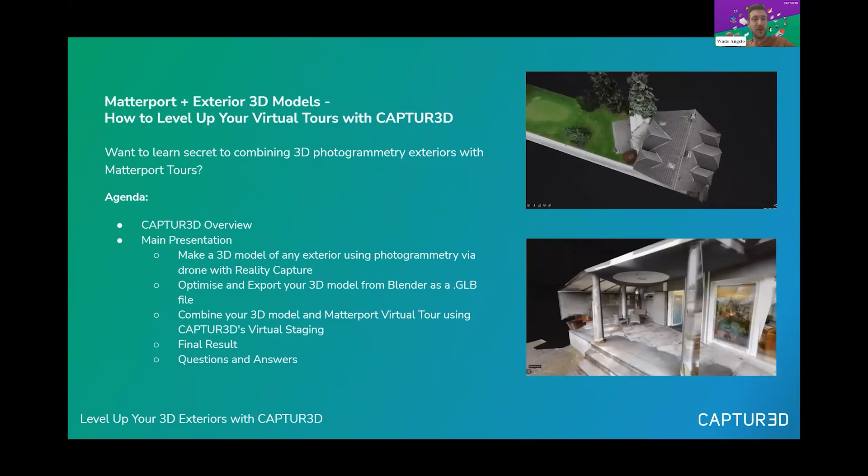So I'll start with my end and jump into what CAPTUR3D's all about. For anyone who doesn't know what CAPTUR3D is and you've jumped in today for the first time, CAPTUR3D is an all-in-one 3D virtual tour software and management platform specifically designed for Matterport professionals.

CAPTUR3D's been around for some time now. We established ourselves back in 2015. Prior to that, we were technically what's coined a Matterport service provider. From there, I believe we were essentially one of only a very small handful of individuals who had the MC200, which is the Pro 1 series of camera.

And from there, we basically brought ourselves this platform and CAPTUR3D to service our own customers. We leveraged what we know in this industry to build CAPTUR3D out to then service other customers who have purchased cameras. That's basically what we grew from there. We're servicing thousands of customers globally.

We've got some notable customers such as Google, Facebook, and Netflix who have been working alongside us. We are a sales and development partner with Matterport in terms of selling the actual hardware, be it the Pro 2, as well as some of the partnerships we have aligned with CAPTUR3D and their platform. We also have patents on some of the technology, which is exciting. We've got some pretty cool stuff behind the scenes, keeping our secret sauce close to our chest.

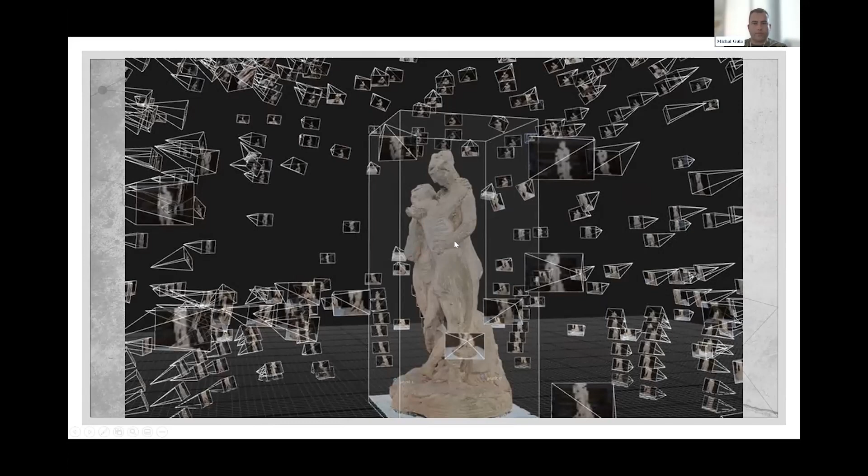So what we will be covering today is basic photogrammetry workflow, optimization of the model for CAPTUR3D, exporting into GLB file, and import and alignment into CAPTUR3D.

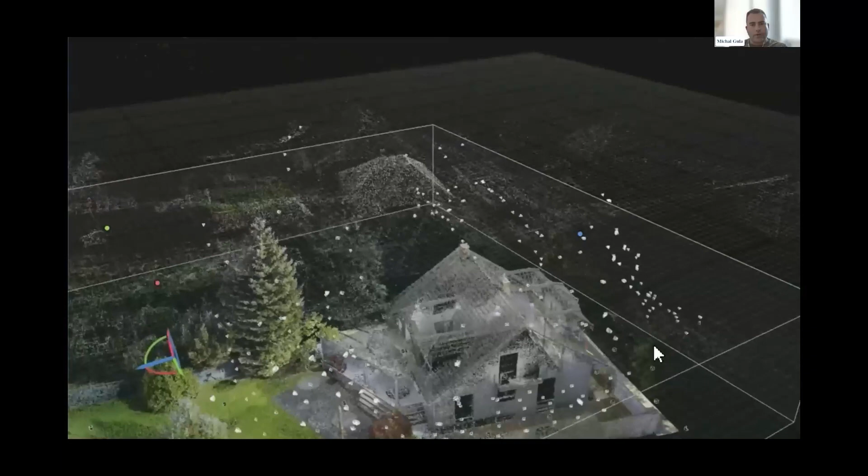In this video, you can see all the camera positions and all the images that were taken for this house project. There were many aerial photos, some ground photos, and also laser scans. You can identify laser scans by these circles, because a laser scan cannot see underneath, so it always leaves some marks.

All these cameras you can see around the house, these are all the positions of the camera where I had to go and take a picture. If you ask how many pictures, as many as you are able to do. In photogrammetry, there is never too big an amount of pictures. You always do as many as you can. Of course, it also depends on your computing power and your time, but the more pictures from more angles you take, the prettier the object will be.

So now we will go through the photogrammetry workflow in software called RealityCapture. It's one of the top softwares to use for this. You can also go through any other software, it will be pretty much very similar, so don't feel tied to RealityCapture. I just have different experience with different softwares, and this is where I ended up because I think it's one of the top.

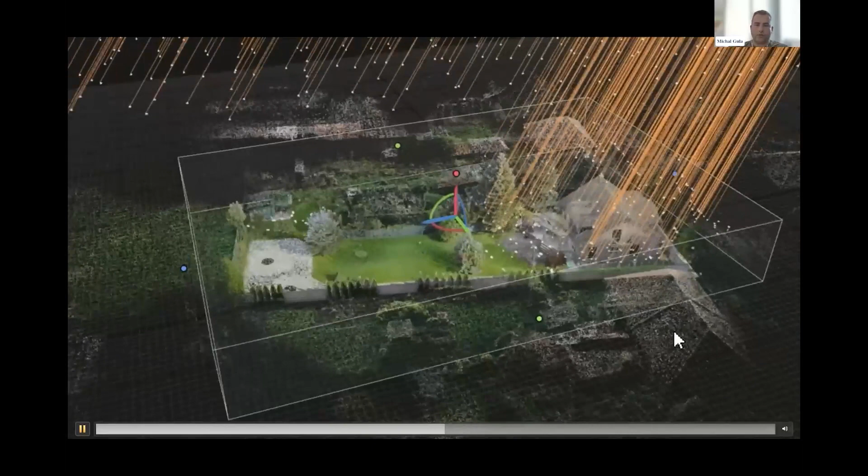Then you hit the Align button, and after a while, you will see the pre-reconstructed or aligned project. All these dots you can see on this picture, it's still not a 3D model.

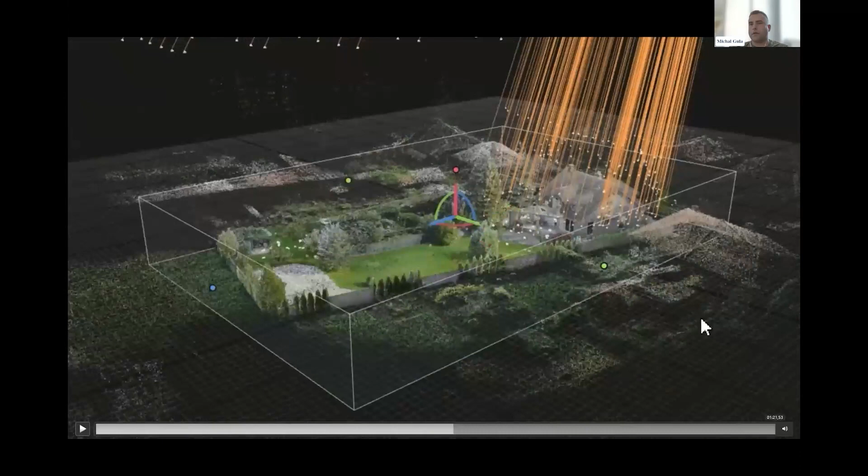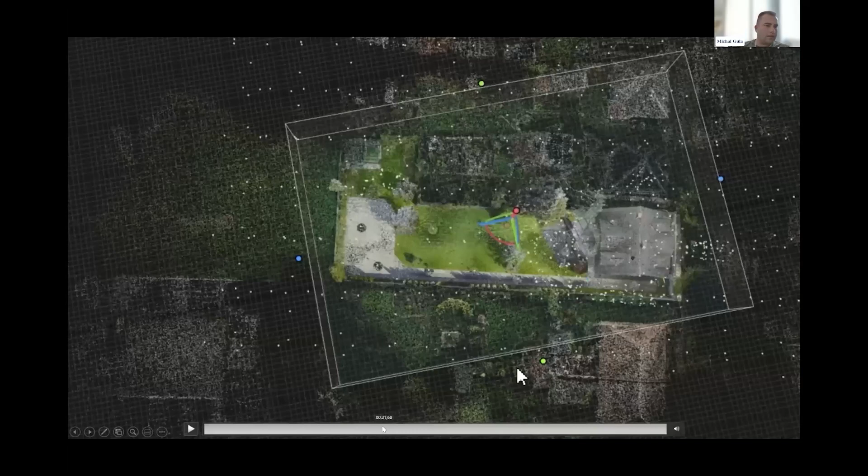It's just, sorry, I'll rewind it back a bit. Just give me a second. We were here. So this is still a learning process. Okay, it's just a few seconds.

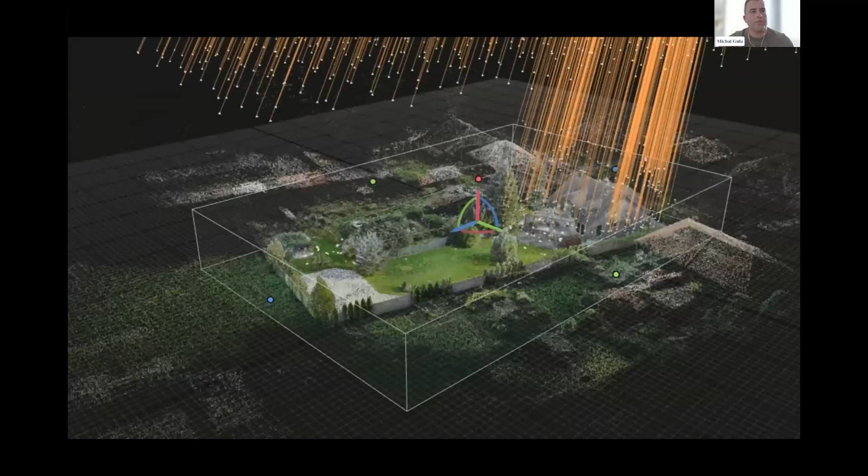These small dots you can see here, these are tie points. This is where the software finds similar places on the images. It makes them into tie points, and it tells them where to be in the 3D model. Now you can see one more time all the cameras and the camera positions. Okay, the alignment looked just fine, so we are happy and we can continue.

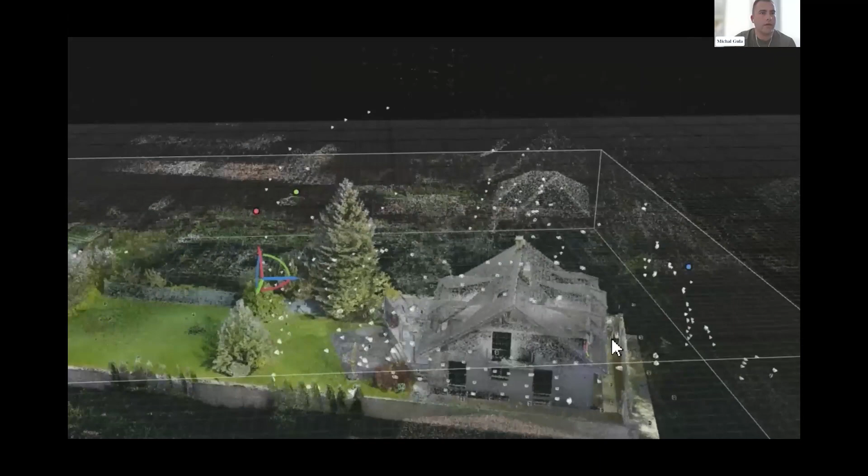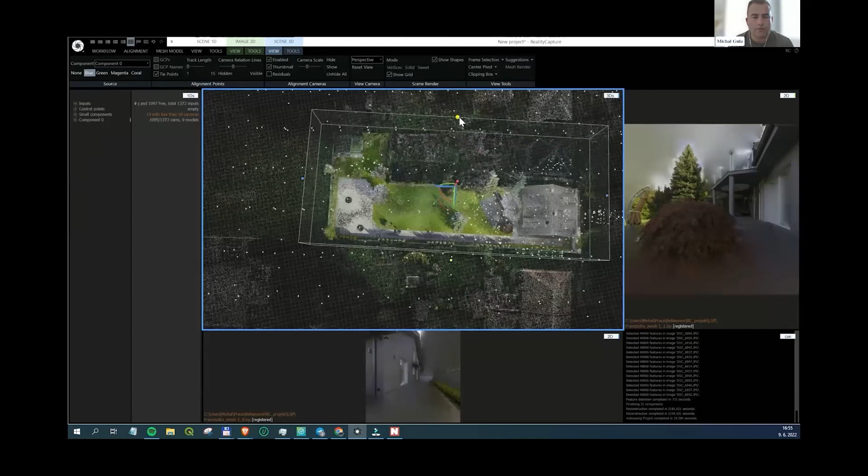The next step will be the reconstruction of the model, the meshing process, texturing process, and then optimization. As a first thing, you need to create the reconstruction region, because you don't need to reconstruct the whole scene that was captured. You only focus on the things that you want to be included, meshed, and reconstructed.

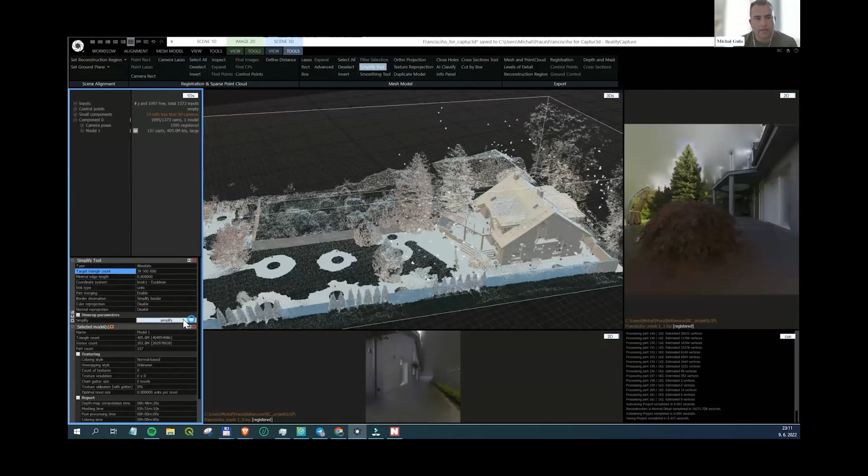The reconstructed object looks like this. It still has too many polygons to be shown nicely. You can see it's like 400 million polygons there. So as a first step, we need to get it under 40 million, so that RealityCapture is showing it as a solid. You will see it in a moment.

At this stage, you usually check if the mesh is okay, if you don't see any obvious mistakes or misalignments. If everything is okay, you just do the texturing at this stage.

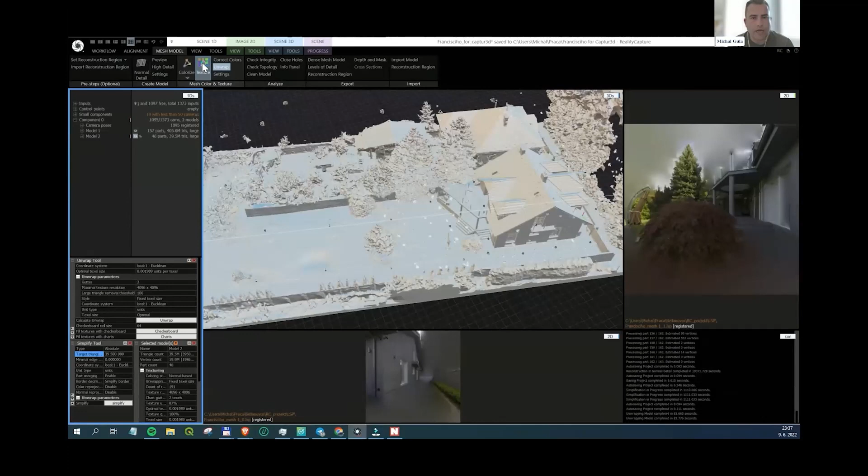It's going like this: at first, you have to unwrap the object. You can set basically what resolutions and how many pictures you want it to have on the textures, which will define how nice the texture will look like on the model.

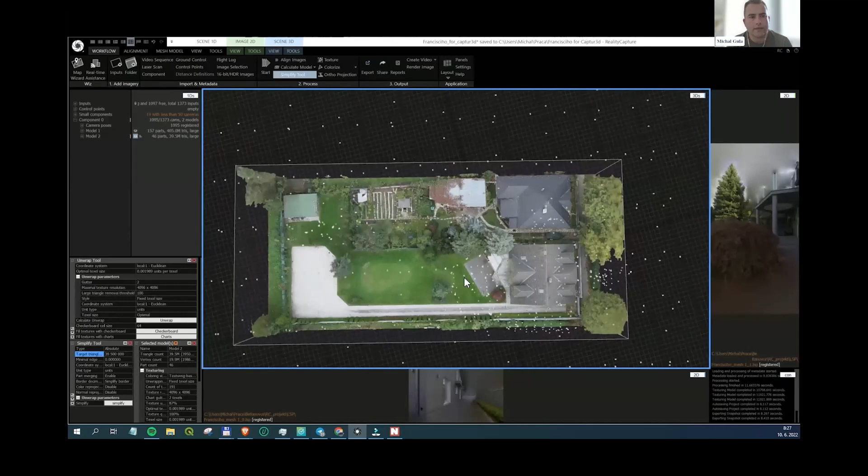So this is the textured model, but it's still pretty big. It still has almost 40 million polygons. It has, I don't see it now, but it has like 200 4K textures or something like that, which is too many. You wouldn't be probably able to display it even in other softwares online.

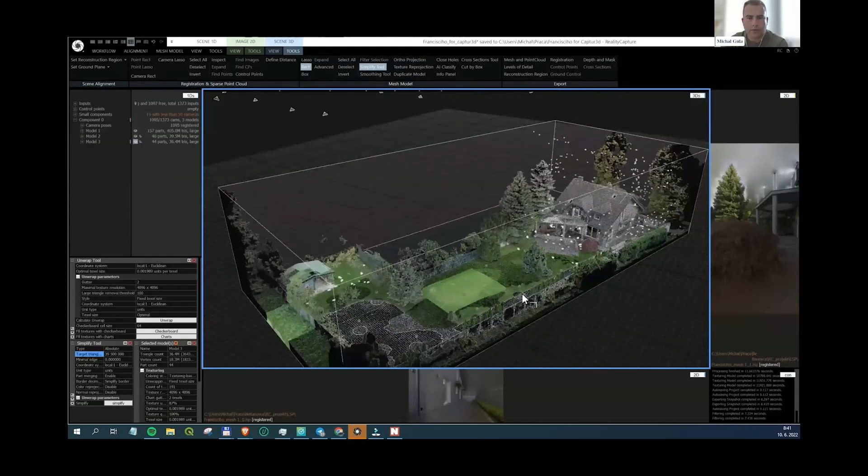So what we will do next is clean it up a bit. We need to get rid of the things that we don't like, or that are just ugly and we don't want to display on the model.

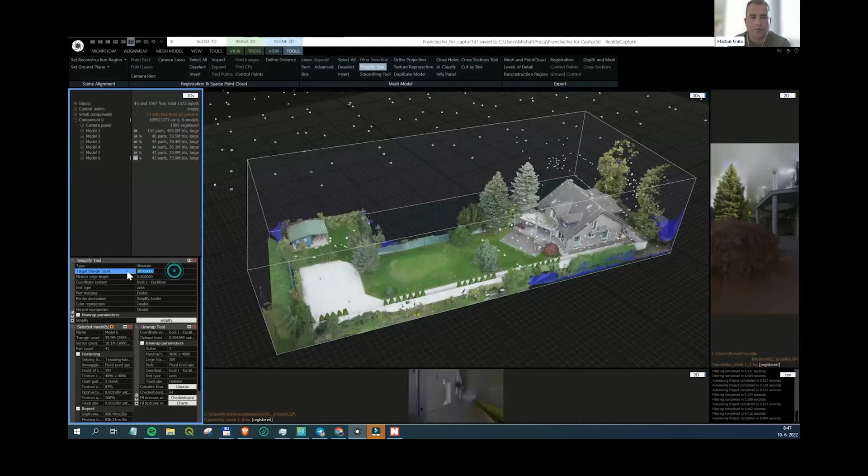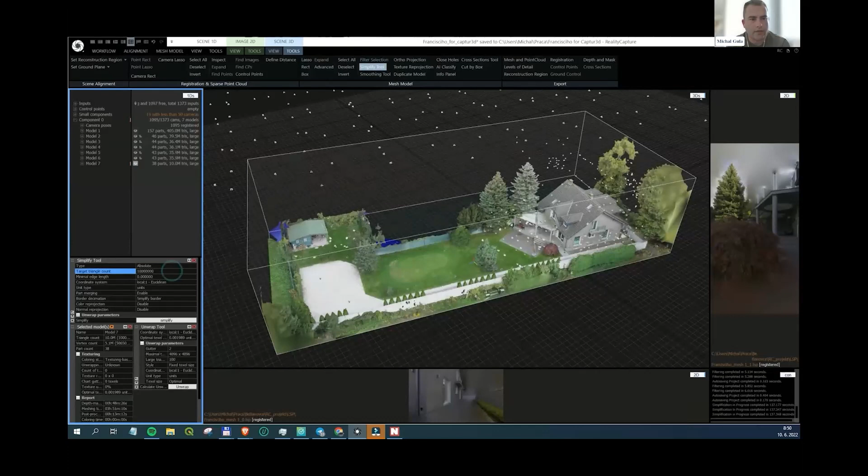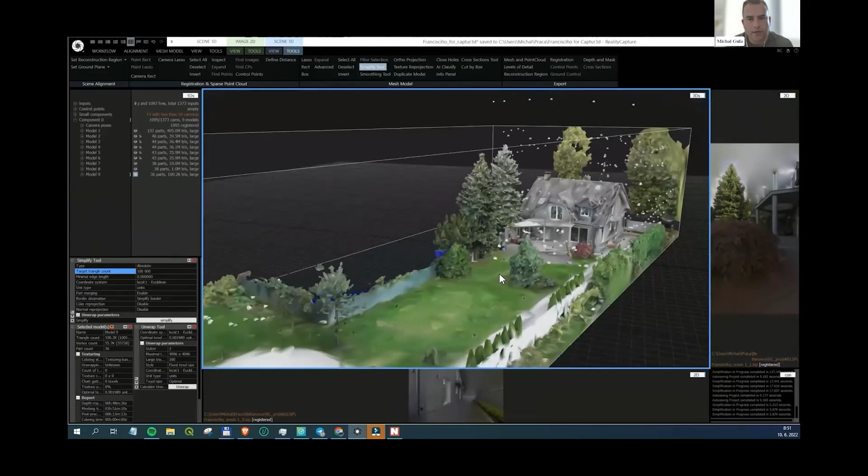We are doing the optimization and simplification in several steps. The software could be able to go straight down to like 1000 polygons, for example, but you want to check the model during the process because you might find some artifacts or mistakes which you would like to repair in the process.

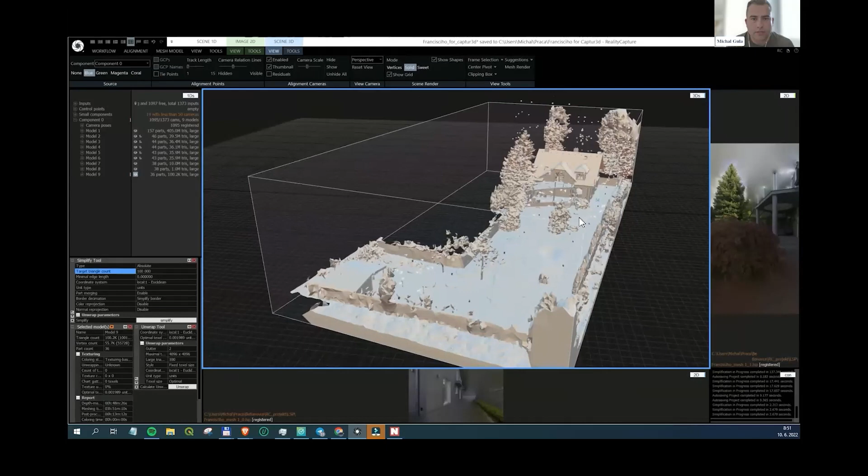So now we are at 100K polygons. The model still looks good enough. Just remember, textures can cover a lot of mistakes on the mesh model, so it's not that important that the model should be very pretty, very neat, very edgy. Textures will cover you.

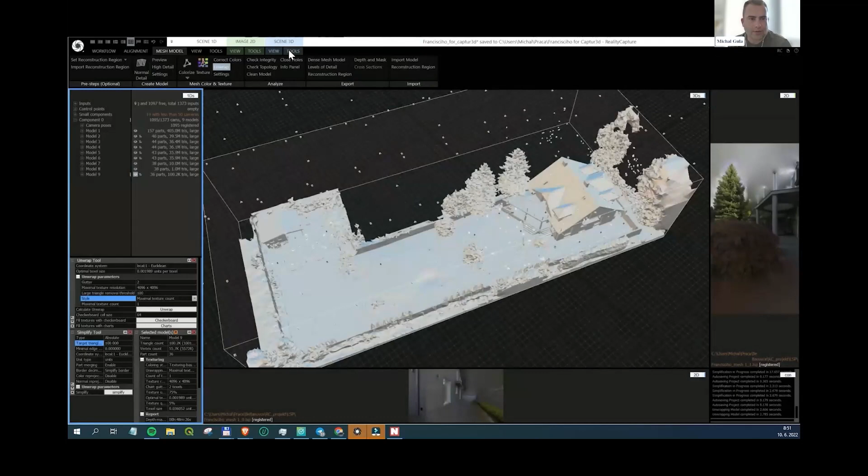So the next step is to reproject the textures from the earlier model. Okay, textures look fine, we do the reprojection now.

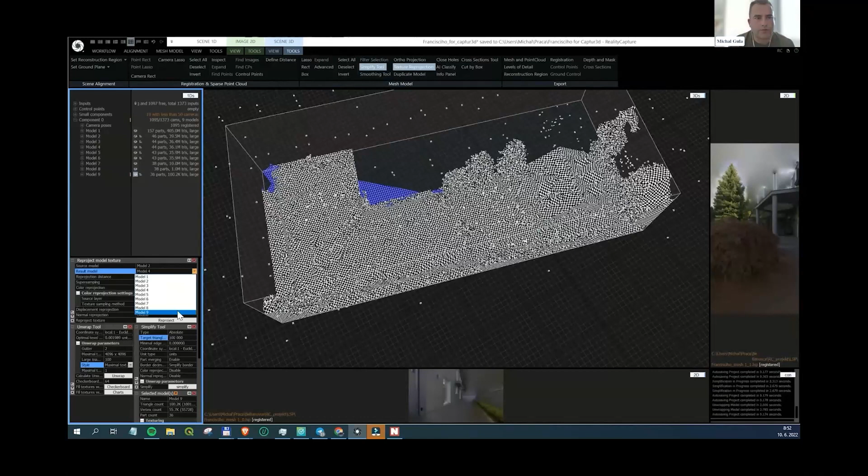You don't have to do the texture process all over again because the previous model was already textured. The software is able to just reproject the texture. It will save you a lot of time.

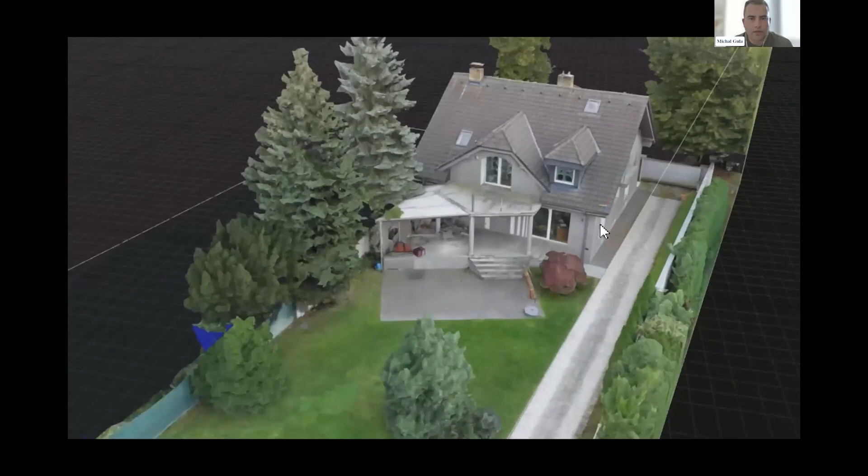So at this model, you can see that it's very similar to the 40 million polygons model, and it's much smaller. So this is what I'm talking about when I say that you need to optimize the project.

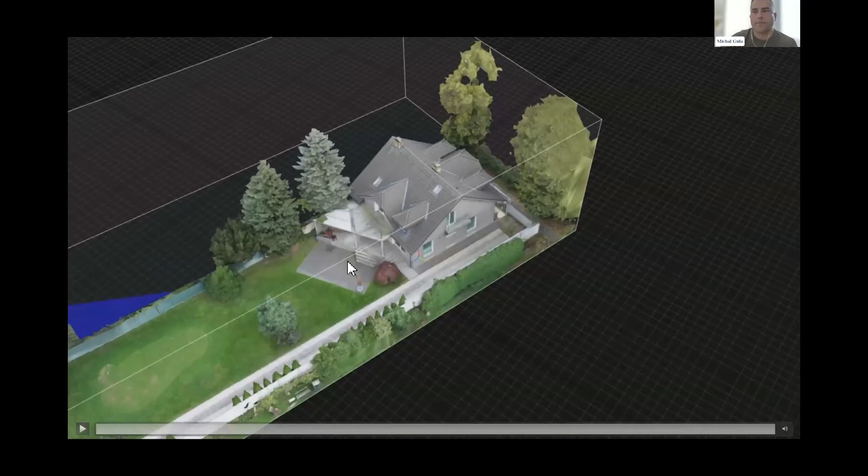You need to get it as small as possible to be able to work with it in Capture. So the next steps, or let me ask Wade if there are any questions. There were a couple of questions. One of the first was asking what software are you using?

I can see it is RealityCapture that you're using, but do you want to just describe in more detail what RealityCapture can do?

Yeah, well, it's pretty neat solution because it's really fast. It can take almost any data that you put into it. It can swallow laser scans. It can swallow aerial images, ground images. It can work with videos.

The videos will be processed and it will be basically cut into different images, and then the images will be processed. So I think that a lot of professionals are using exactly this software because, as I mentioned before, it's one of the top.

Another question was, because it doesn't seem this is available on Mac OS, was there any other different type, maybe Pix4D? I believe you mentioned Pix4D before, something that's on Mac that might be also appropriate for an operator.

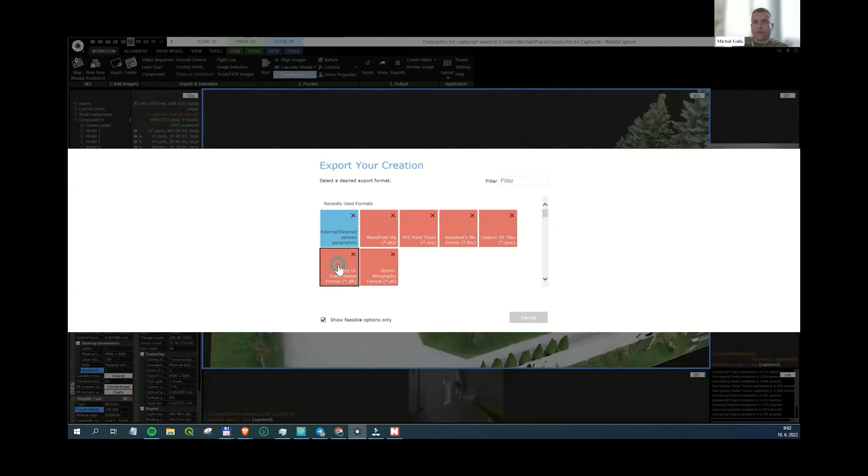Most softwares should have the possibility to export GLB files natively, so you don't have to use another software. In this case, RealityCapture has this function. It's pretty straightforward, you just pick where you want to locate the file and hit export.

What you need to check is that you don't want to spread it into more files, you want it as one file, so export save mesh by parts should be no. What you want to do is include textures, so export textures yes, export embedded textures yes. I'm not sure if RealityCapture also allows you to export non-embedded textures as separate files, but in my experience with GLB files, it's always better to embed textures into one file.

Nothing else should be changed. That's what I just talked about with the embedded textures. You hit OK and export the GLB file.

Another case is when you don't have these options, you usually want to export the OBJ file. OBJ is the most common file to export 3D objects, so every photogrammetry software certainly has this option, and you export the OBJ file.

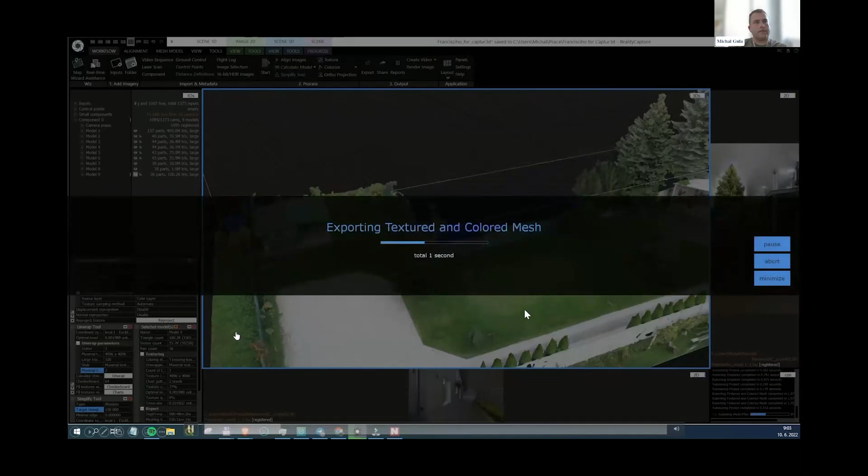Again, you don't want it split into different parts, you want it as one OBJ file. You don't need to embed textures because you'll be doing this in another step with Blender. So you just export the OBJ file with textures.

Then you're free to go into Blender. If you don't know it, it's open source free modeling software with an unlimited amount of options. So what you do is load your OBJ file. You can set the transformation, because when working with 3D it sometimes happens that your object ends up in the wrong position.

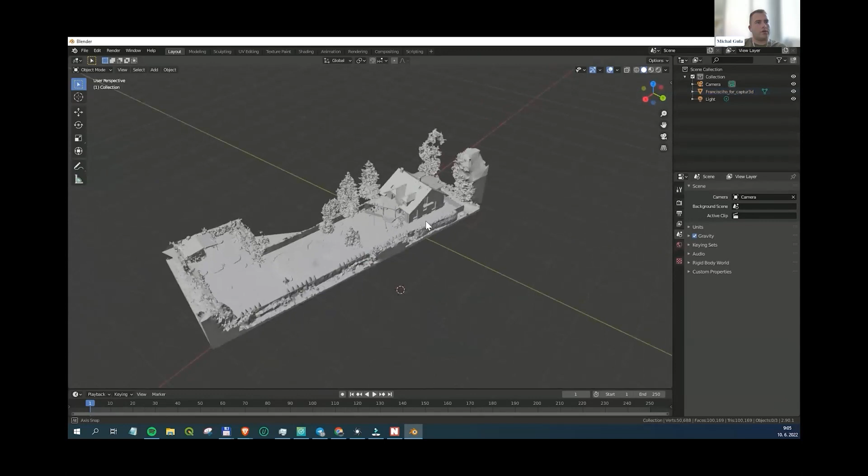So you load your textures into the viewport, and if you're happy with the model, you can export it. It's pretty straightforward, just hit export, you have the GLB option there. You just rename it and make sure you pick the GLB format.

Yes mate, thank you. I had a couple come through, actually more towards what kind of workstation is needed for this kind of speed. Are you able to provide what specs of computer you have currently that was running the software? Yeah, for this kind of speed you just need a good video cutting tool.

I sped it up for the video, but of course photogrammetry is quite heavy on your computing power. You need good CPU, good RAM, good GPU. The more images you want to process, the better computer you need. But basically the absolute minimum you need is an NVIDIA graphic card with CUDA cores.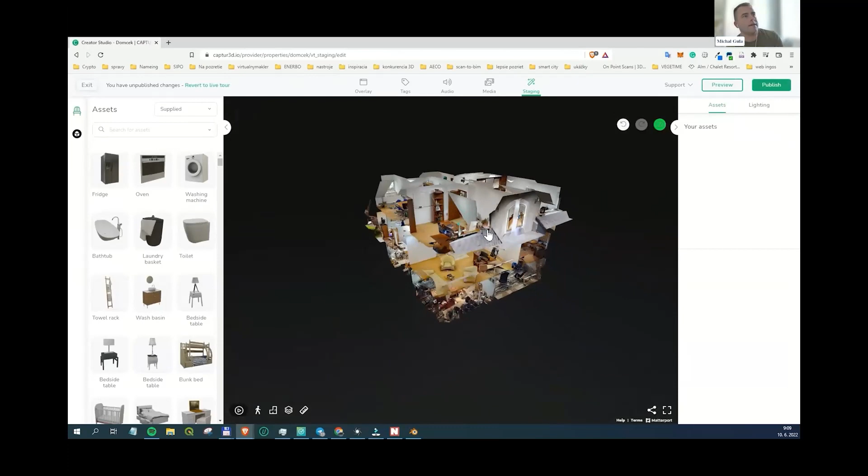So I had to redo the previous model. On the left side, you have the assets part where you want to load your own GLB file. You go to custom, hit upload, and just drag and drop or browse for your files. You pick your GLB file and move it there, so it will load into Captur3D and add it to your asset library. While that's loading, you can also add custom thumbnails to make it easier to find.

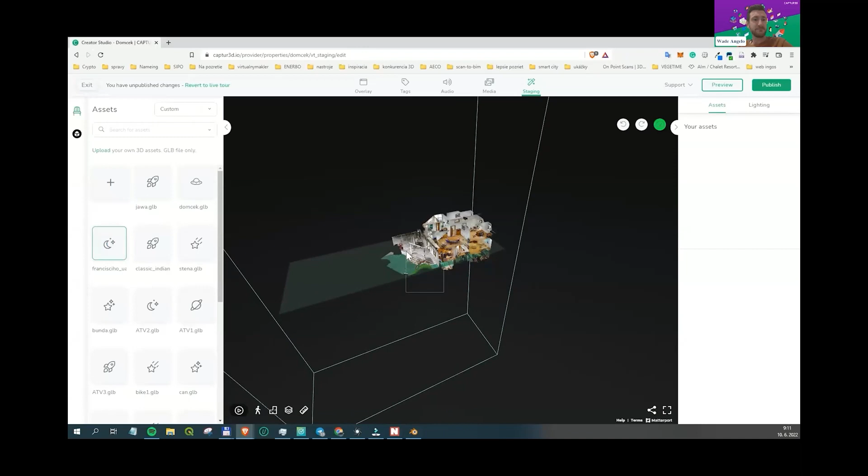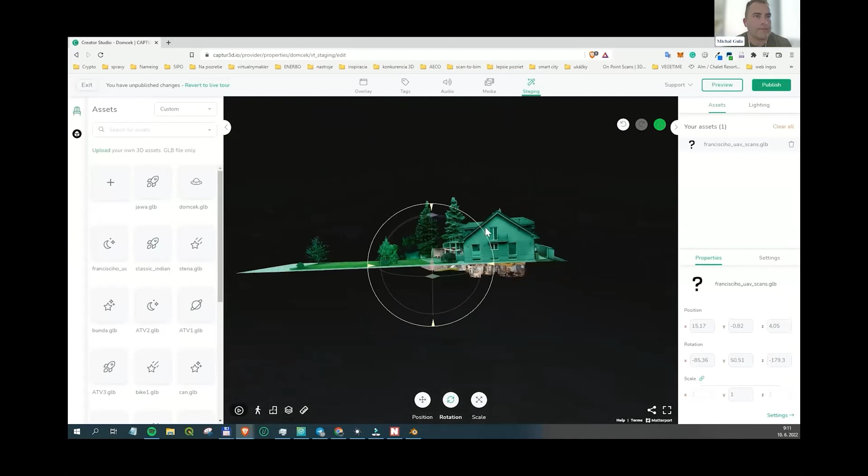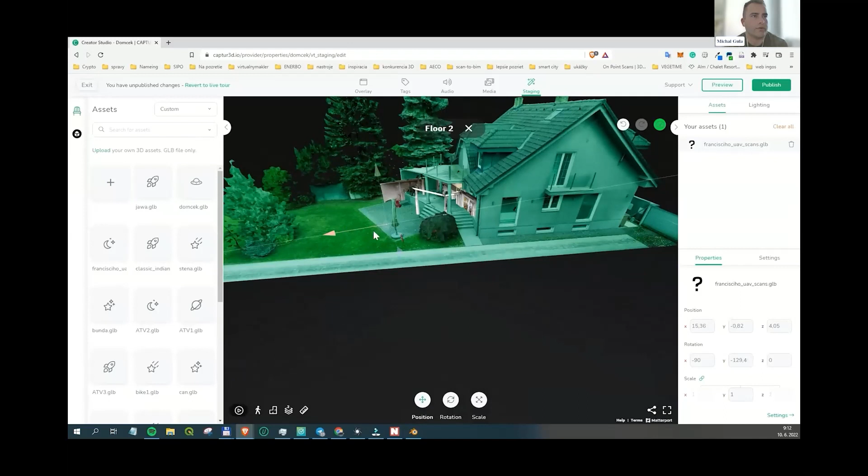Then you just take the asset from the left side and bring it into the viewport. As you can see, it loaded, not in an optimal way, but you're able to move it, rotate it, and also scale it. Sometimes your model won't be scaled accordingly — this happens when you don't use control points or include laser scans in your dataset when creating the photogrammetry project. But don't worry, you can scale the project to the size of your Matterport tour. This is just to show you how easy it is to align it with the Matterport dollhouse view.

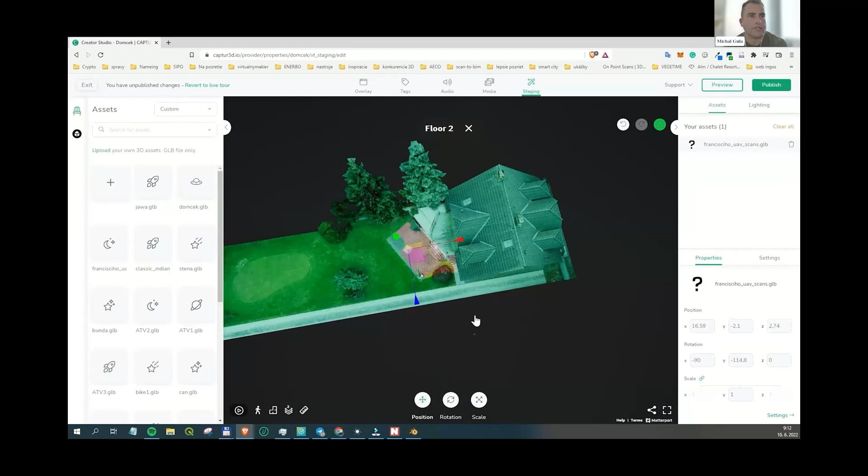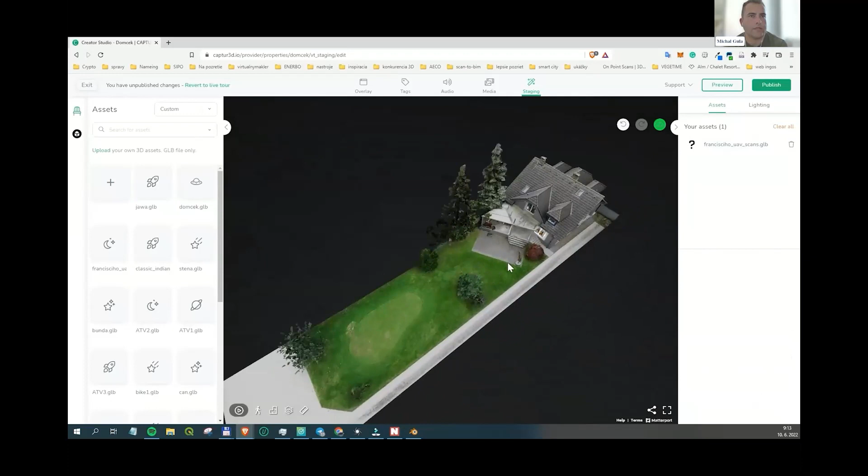In my opinion, it doesn't really matter if it fits perfectly, because it's enough if your mesh model of the exterior is covering the dollhouse view of the Matterport, since you won't be seeing both at one time. So it doesn't really matter if it fits totally perfectly. But as you can see here, it more or less fits nicely.

Okay, you just hit publish and you're ready to share your project.

So the basic idea behind this is when I first saw the Creator Studio from Captur3D and the ability to load a sofa or a chair, I just asked myself, why not another mesh model? Why shouldn't the GLB file be the exterior of the house? So I tried it, it worked, and that's how the story about this webinar began. And now we're here explaining it to you. So I think that's all from my side and from the workflow.

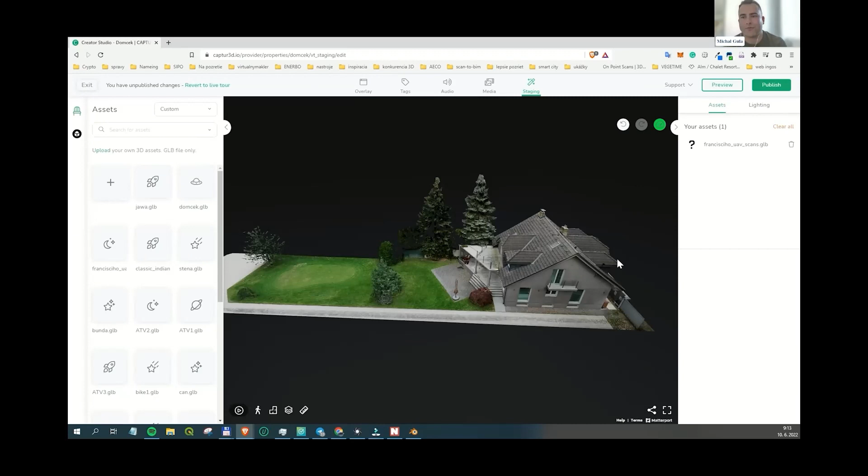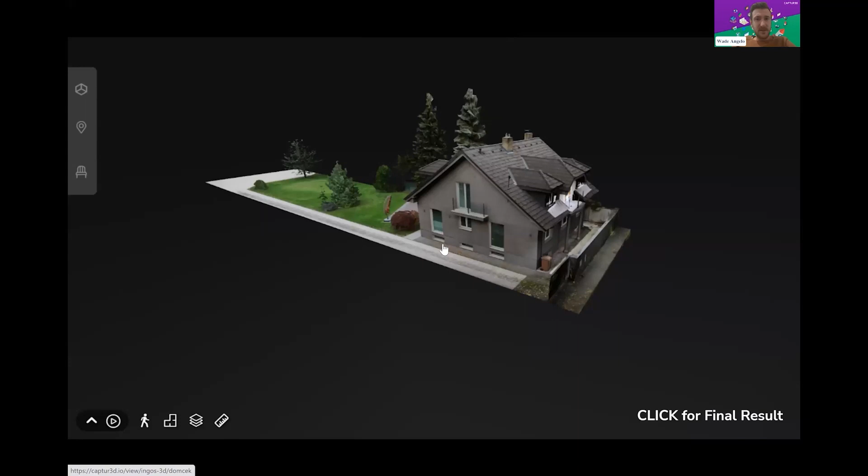So as you can see, from my side, this is the final product. It's actually currently viewing from a link that's been created by Captur3D. So this is the exact tour. You can see now I'm inside the Matterport tour itself, again on a web browser. I'll be passing on the link shortly, but you can see now I'm looking around the actual internal side of the house itself.

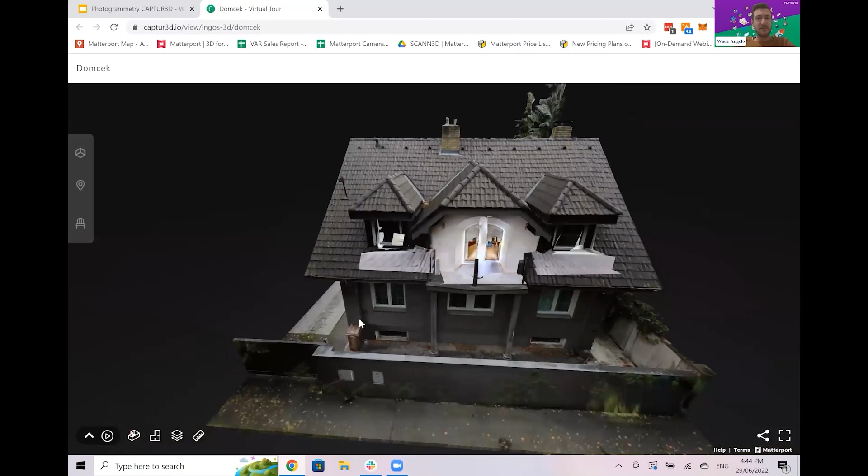You can see I'm moving through the space accordingly. And from here, I can then go into the dollhouse. So from here, if I spin out, you'll now see, completely on the web browser, I'm able to rotate accordingly. I'm doing this live, as you can see on my web browser. The idea is you can toggle this on and off accordingly, so you've still got the Matterport tour as well. Then you've got the actual GLB file that Michael has created. I'm completely just moving around.

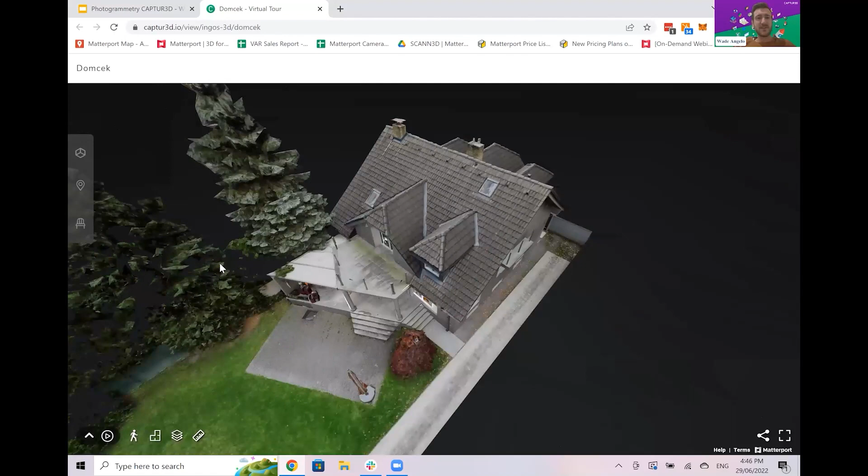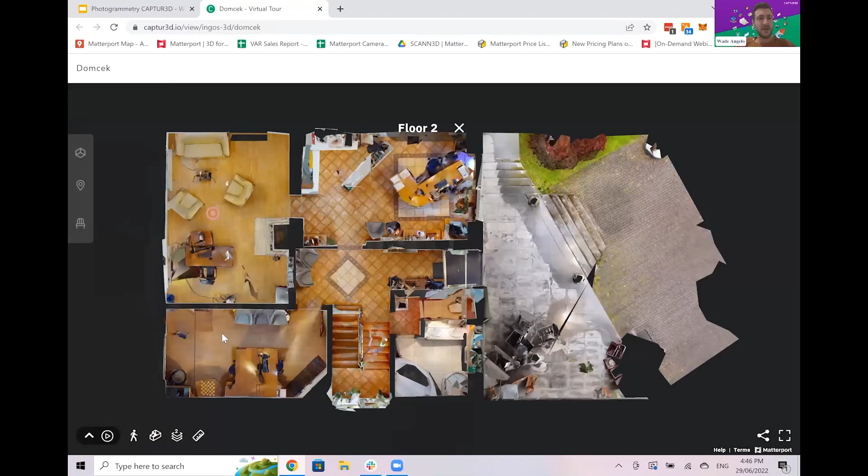As you can see, I'm going from dollhouse rotation here. I can then go into floor plan. I'll also go back into the view itself and go up to several levels. I can go back to the floor plan perspective of the tour as well. I can turn the staging on and off accordingly, as you can see. So I can basically zoom out if I want to, which is really, really cool.

But Michael, I remember when I first saw this, I'll ask you a couple of questions and stop sharing my screen for now. Can I ask, what other kinds of things have you experimented with? I don't know how cheeky I can be by asking this, but I've noted that you've done things in Captur3D using, I suppose, other maps or other types of sources that have come from other platforms rather than directly from a drone. Is there any other kind of platform people can use to put street views and things like that into this particular example, like you've shown before?

Is there any way, rather than doing it directly, of having some kind of repository or things people can take from their own collections—like citywide stuff that's their own, rather than the drones themselves? Well, the photogrammetry is nice because you can take images from your computer, from small objects to whole buildings and whole cities. So you can start by capturing your sofa at home, making a 3D model of it, and importing it into your Matterport tour as virtual staging. It's as easy as that.

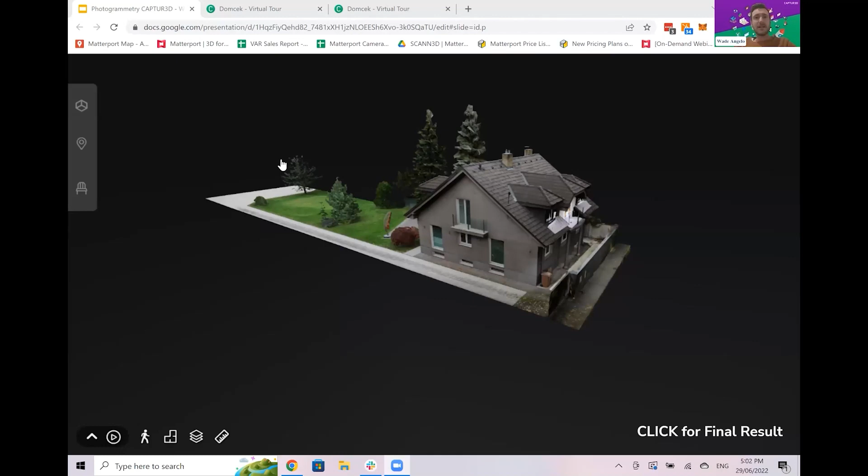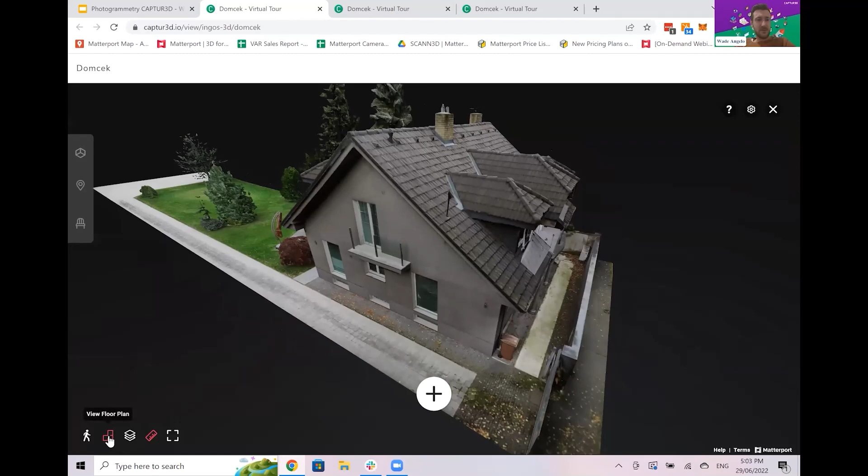And the idea is you can then snap to certain areas of interest and be able to draw top and bottom - so I will turn off snapping on this occasion. Can be a bit of a pain in the bum, but using the magnifying glass there, you can go straight down and measure accordingly. But the idea is we wanted to check the outside, don't we mate? So let's have a look - we'll go from the dollhouse perspective, maybe even go top down onto floor plan, and zoom out a little bit.

So what we can do is, if we can keep zooming out, using my finger here. Hopefully I don't push anything. Actually, we'll do it from this perspective. So we've got the measurement tool, we go plus, go from here, and we'll go from there. And there you go, look at that. It tells you it's approximately 15.67 meters.

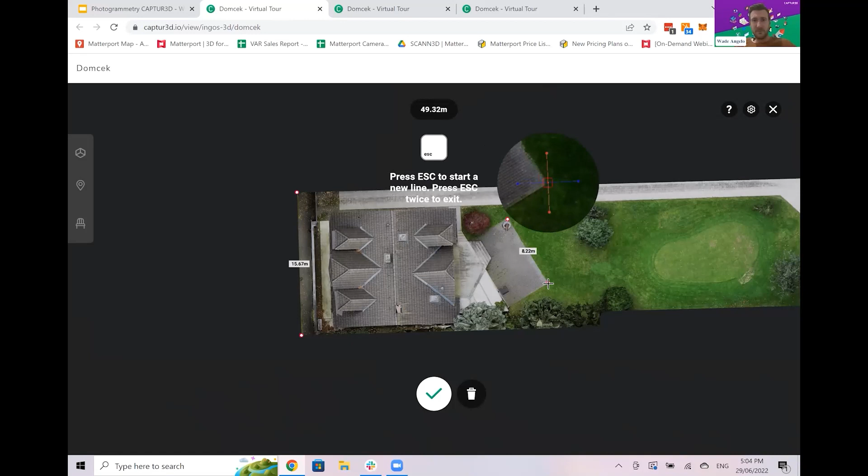Let's have a look at maybe this area here. You can see it's snapping to there, from there to there, which is brilliant. Look at that, and again, I can be more precise if I wanted to.

Let's have a look at the dollhouse. Maybe let's measure some of the other parts of it. What do you reckon? So I can just play around here, go plus, and maybe see. Then you can see here what's happening is the magnifying glass is going inside the internal perspective. So it has its limitations, but you can see it's got some functionality, which is pretty cool.

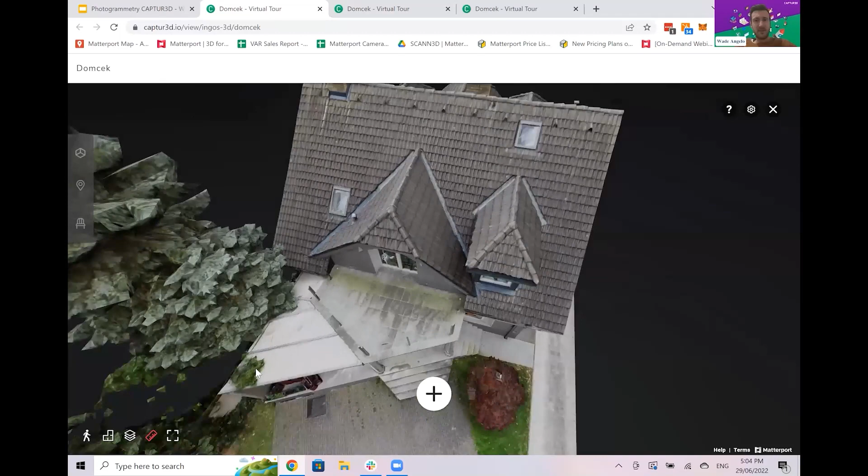Great, thank you very much, Wade, for this. I'm really happy that I learned something from this webinar. It's okay, there you go.